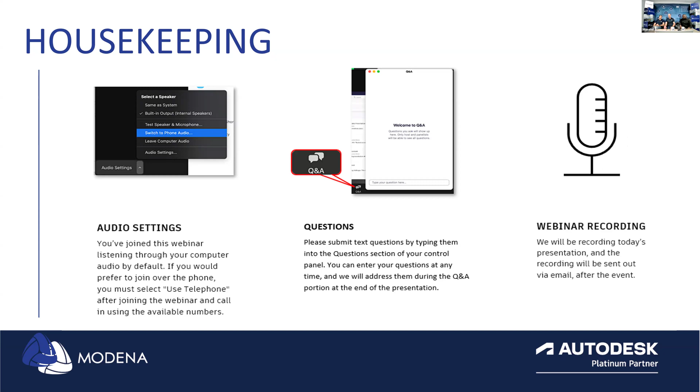Wynand, if you could take it away. So just a quick overview of the contents we're going to discuss today. We're going to look at what infrastructure is, the role Autodesk is playing in infrastructure, the life cycle of an infrastructure project, and then we'll run through some of those cycles in more depth. A little closer to the end, we'll look at future maintenance and monitoring, as well as some smart designs to operation with regards to our projects.

So first things first, what is infrastructure? We normally think, well, what would infrastructure be? A bridge, a road, things. But the term is very broad, it touches everything. It's basically these days the backbone of what connects us as people. If you think of clean water access, if you open a tap, the water comes out. Where does it come from?

Reservoir, pipe, then tap - that is the water infrastructure network transporting water to our houses. So we don't have to live close to rivers anymore. It's not necessary.

Infrastructure allows reliable transport, safe wastewater disposal, and gets clean water back to us. It's not just that, infrastructure covers the whole thing - power lines, power grids, it's infrastructure. Even the sidewalk you walk on is infrastructure. It's a very broad term.

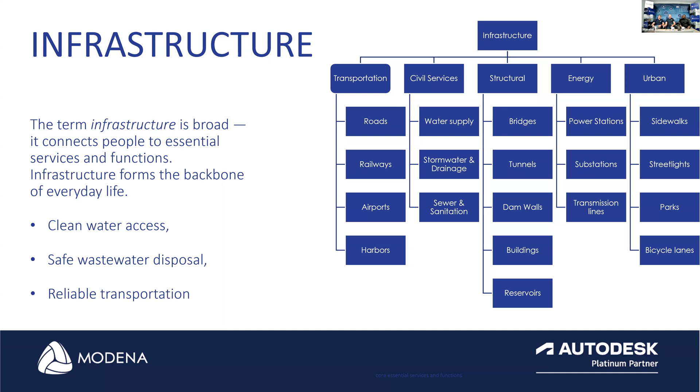So what is Autodesk's role in infrastructure? Autodesk created purpose-built tools tailored for design and analysis of infrastructural systems, and together they compiled an AEC collection - the architectural, engineering, and construction collection of softwares.

In that AEC collection, we have InfraWorks, where we can generate concept designs, do some pre-development analysis, and some detailed visualization in our designs.

Then there's Civil 3D and vehicle tracking, also included in the AEC collection. It allows us to focus more on detailed designs, accurate pipe network design and analysis. We can use vehicle tracking, part of Civil 3D, to do road safety checks, geometry tests - will the truck go around the corner? Is the sight distance good enough? That sort of stuff.

Then we have Revit and Advance Steel for our structural and MEP modeling, as well as for accurate visualization of structural elements. That's touching a bit more on what Mr. Thabang here can do, as well as one of our other colleagues who couldn't make it today.

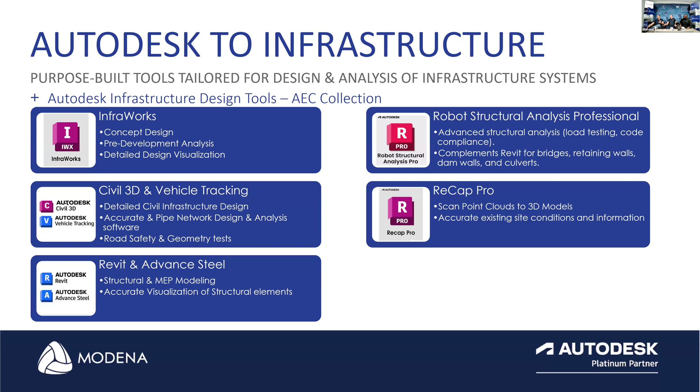So with regards to as-built information, with the whole digital transformation we here at Modena are pushing, ReCap Pro allows us to literally go and scan information and bring it into the design software, using a digital terrestrial 3D laser scanner. It even allows us to do that on infrastructural projects. We'll discuss this a bit later when we look into the future for infrastructure.

Last one, Navisworks and Docs, where we can do model coordination, clash detection, construction sequencing, where we can literally show our clients and stakeholders what the construction sequence is going to be if we build the structural element. Where do we start? We can manipulate it to see, okay, maybe the staircases can be built later, or these columns can be built later, the foundations need to happen first, so that we can plan accordingly in our construction plans, to not get stuck deciding what's next. It also assists us in not delaying the project.

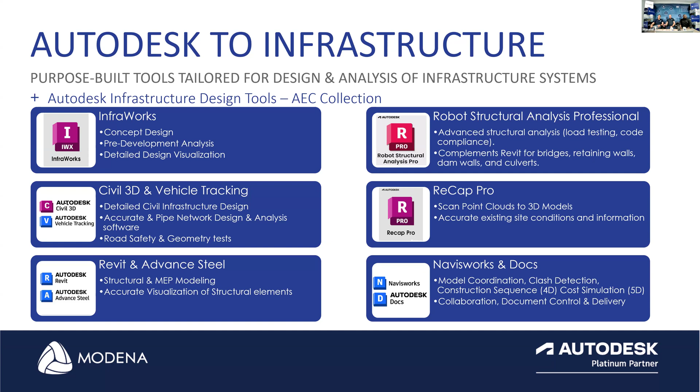Next on our list is the infrastructural life cycle of a project. Each and every project needs a starting point, and where is that starting point? Normally in our heads. We have an idea, and then there's an end point where we hand it over to the client, and they start implementing, operating, etc. For the life cycle of the project, we have to start somewhere: concept design. We have the idea, we have to put it on paper, we need to generate that model to give our clients what they think of. As we drive digital transformation, it might not just be a PDF.

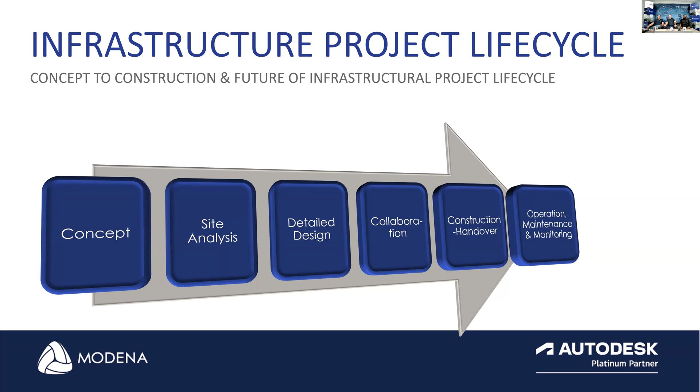Let's look into the first one. What is a concept design? It's the actual starting point, the initial idea, where we shape the ideas, where we get different scenarios that we can explore. It allows for early decision making on the possible and practical issues, to fine tune that design in the beginning already, so that when we present this to a client, we don't present them with something they might laugh at, but rather think, this company, this is what I want.

Concept design allows engineers and planners to evaluate feasibility, investigate construction constraints, terrain challenges, and target the applicable standards early enough in the design phase so we can fine-tune it before we get to detailed design, and avoid the client saying 'no, we have to change this' and going through all those headaches again.

Talking about the client, we've got a question from Anonymous: won't you start with the client's brief before we go into the concept stage? Yes.

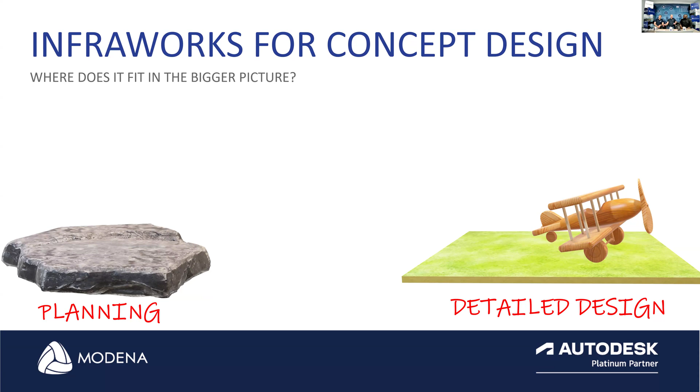So up next we want to present InfraWorks for the concept design. Now, where does it fit in? InfraWorks basically bridges the gap between the initial idea and detailed design very easily, and you'll see shortly why I mean that. It empowers the user to rapidly develop and evaluate infrastructure concepts in a real world context.

Now, InfraWorks has a lot of key capabilities. As we discussed, it allows for that concept design, that pretty picture it can paint for us that we can represent to the client, do some pre-development analysis, get everyone's approval, etc.

I think there's a lot of questions, sorry, just want to go through them. So we've got a question again from Anonymous. The question is, looking at this kind of collaboration, would ACC be the right environment for this? Anonymous just removed that question, I think maybe they're retyping, we'll get back to it when it comes back on. We have got a question from Mr. Erasmus, Quibus, asking the same thing, so it just went from Anonymous to Quibus.

Who would typically then control the main model, and what would you do it in, InfraWorks or Civil 3D or Navisworks? And then we've got a question from Julian saying, how can InfraWorks be used to quickly model a proposed road alignment and pipe network in a real world context so that I can visualize feasibility before detailed design begins?

So we'll get to the second one. Let's answer the first one. The first thing you would need on any kind of project is a common data environment. So ACC is actually the perfect solution for a common data environment. Why? Because it's an Autodesk product and all the Autodesk products tie into it, we're talking file formats, etc.

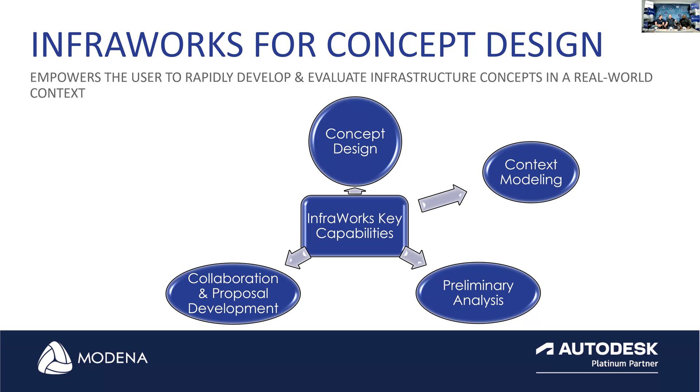Then there's the collaboration and proposal development, the question that we just had previously. We will focus on that section. And then integration with Civil 3D and Revit is made very easy inside InfraWorks. Right. So let's jump into depth with regards to InfraWorks for concept design.

Now, this is what we just discussed. It basically takes something similar to a Google Maps image and it aligns it with a DEM, digital elevation model, that is generated from GIS data currently available from places like the South African Geoportal. NASA, for example, has some elevation models that Autodesk is using to generate those 3D elements.

And that's included with the subscription.

And so what it does is InfraWorks has a model builder where you can go anywhere in the world and grab a section of a surface area and start modeling from it. It automatically picks up existing road infrastructure, some building outlines, but it only assigns its own styles to it, so it's not the actual building that you're seeing.

It assigns the Bing Maps aerial imagery, and then it also represents water areas. So if there's, for example, a dam or a river, it will actually show there's water running there.

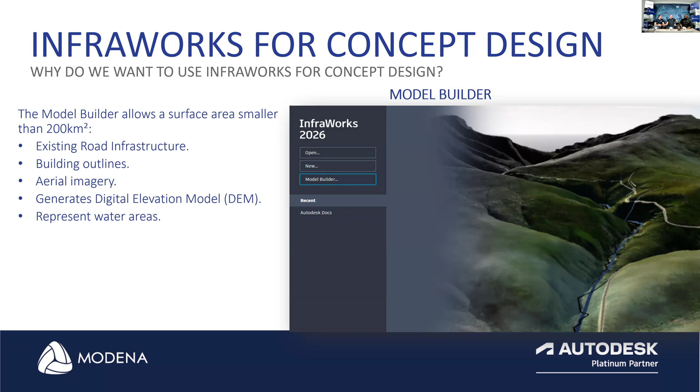We'll get to that. Then the model builder, a generated model, will literally allow you to start adding additional stuff. For example, your additional roads, for the road widenings, for your Revit buildings that you can place in. You can go and add city furniture if you want to build that smart city where you add robots.

So I can take my smart city from here in the cloud, wherever it is, throw it into InfraWorks and overlay it onto existing infrastructure? Yes, you can do that. That's very cool. You can do that.

Okay, and it also allows for initial platform creation that our building is going to stand on. And then there's also where we get to the more in-depth structural elements, like the bridges, the tunnels, that sort of stuff.

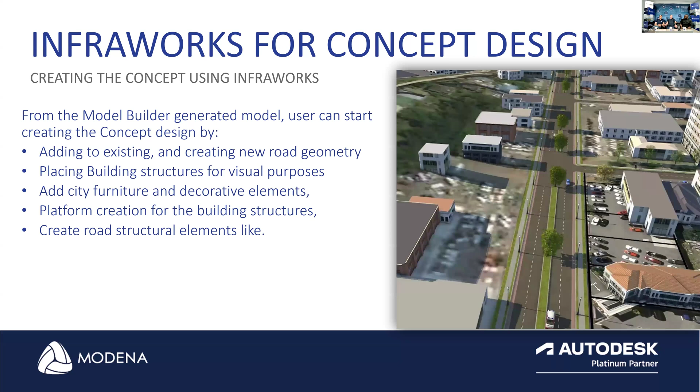Okay, so pre-development site analysis is the second section. It allows us to look into the project for viability, feasibility, possibility, practicality. Is it possible or not? What am I planning? The roads.

We can even do traffic analysis where I can literally go in depth and set up a traffic light sequence and then simulate what the traffic will look like and actually see, okay, do I have to make my road wider or not?

Where was that project where they built a bridge from both sides of the opening? And when the bridge met in the middle, it wasn't aligned. It was off by a lot. Obviously, they never used... I can't remember. They never used it. It's an international project, yeah.

They would not have used tools like this, because tools like this would have shown them the issue in a virtual space before it happened, before the guys actually went to site. Yes, indeed. Okay, all right. And that's why we want to actually drive the digital transformation. Yes, that's actually part of coordination, right? There's something we call clash detection. Okay, that's a big clash.

How do you unbuild a bridge? Happened in Cape Town as well. Something locally, in Cape Town City there's a bridge that just ends, stops up in the middle - nowhere. They built it and it just stops. Yeah, it just stops, and clashes cost millions.

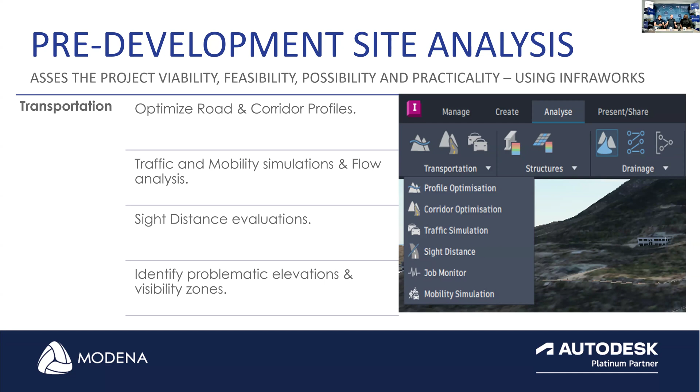Fantastic. So there's the whole traffic and mobility, the sight distance evaluation - very important for road constructions - and then to identify problematic elevations, that's that best possible route, like I've mentioned.

And then structural - it allows for that preliminary line girder and refined bridge analysis. Now, this is not a robot structural analysis type of software, so I would still recommend using that - it is part of the AEC collection. So why not use tools that are more accurate with regards to design standards, etc.

We have some questions. We've got two questions - one's from Jason. Jason's asking, can external as-built data be loaded into InfraWorks to allow checks during feasibility? And the second question is gone.

Alrighty, so can we answer Jason's question, or is that coming up in the presentation? Can external as-built data be loaded into InfraWorks to check - so, can external as-built data be loaded into InfraWorks to allow for checks during the feasibility study? Yes, it can.

Since it automatically, like I said in the beginning with Model Builder, you go literally anywhere - if the road was built there, it automatically identifies that the road is built there. It's not using the same assembly that road was normally built on, if we were to think of Civil 3D perspectives, but it literally shows that there's a road there. Now if you want to widen this road, maybe change the sidewalks, you have free access to go and do that inside InfraWorks directly. So Jason, yes, it can, in short.

Back to structures, InfraWorks allows you for the placement of the geolocation points of your structures, meaning bridges - I'm not talking about buildings now, I'm talking about road structures. It also allows you to prep the model for in-depth structural analysis and modeling.

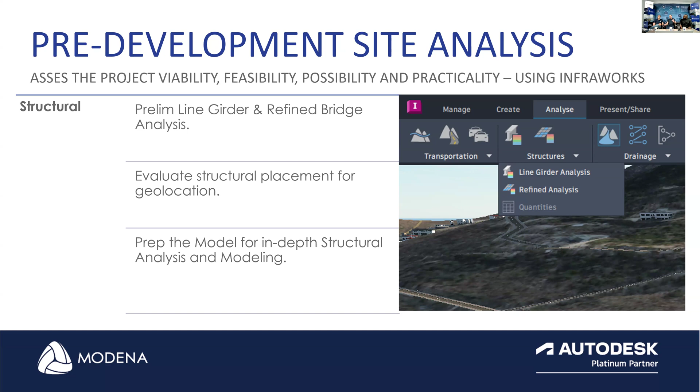And then the drainage that allows us to automatically generate watersheds in just a few clicks. It already picks up the design roads inside InfraWorks, and then it will literally show you the points where the water is going to dam up, where all the water is going to come to a specific point, and then we know exactly where we need to add the culverts.

And then there's the preliminary pipe network analysis and auto editing tools. InfraWorks is a bit limited with regards to pipe network creation, but you can also simulate some rainfall scenarios and identify flooding and overland flow paths.

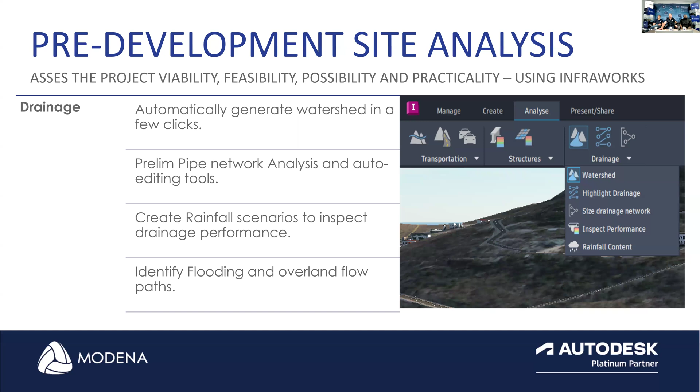There's nothing existing. I can use InfraWorks to build a bridge, simulate traffic across the bridge, take that very bridge into Revit, fine-tune it in Revit, push it into Robot to make sure it won't fall. Go through the process, appoint a contractor, and in 12 months I've got a working bridge.

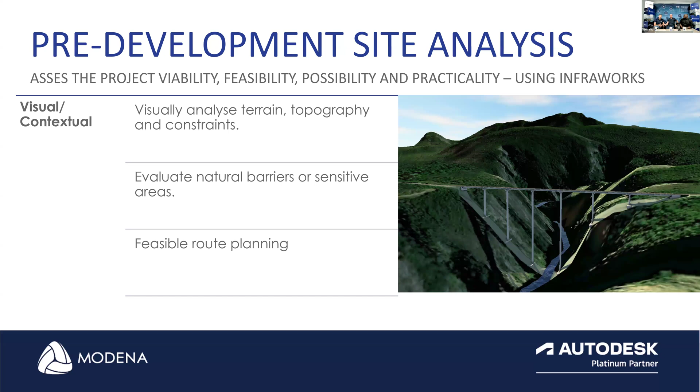That's insane. Yeah, basically exactly like you've mentioned. So that's called a workflow. For me, it's like - how did guys do anything in the past? Instead of 12 months, it used to take them 12 years.

And then there's some additional connectors that you can add, like the ArcGIS connector that can show us where the wetlands are, the flood zones, some zoning regulations, etc. It's a very fancy tool to use.

Then there's the additional external data sources, like I said, South Africa's geo portal, that you can very easily go and grab some surface information in order for you to start your more finer, in-depth, detailed designs.

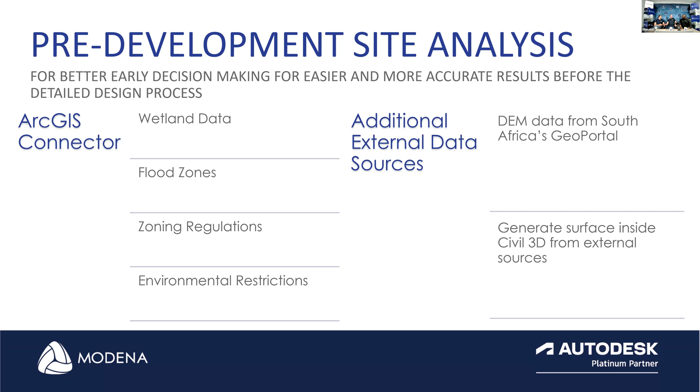Right, some detailed design and analysis section. This is where we move away a little bit from InfraWorks, where we can literally take the InfraWorks information into software like Civil 3D and Revit.

I'm going to talk a bit more about Civil 3D first. InfraWorks planning roads basically only takes over the center alignments. But the component roads is seen in Civil 3D as actual corridors. It automatically assigns the assembly for it, as well as generates the vertical alignment for that road. So it already knows exactly from InfraWorks what the elevations for cut and fill conditions to target.

So all you have to do is just look into that, change some curves here and there, change the assembly a bit, reassign it, and it's going to be much easier than actually starting in Civil 3D from scratch. A lot quicker as well.

Right, and at the end of the day, you can add some additional analysis tools that we will also be focusing on in a few seconds.

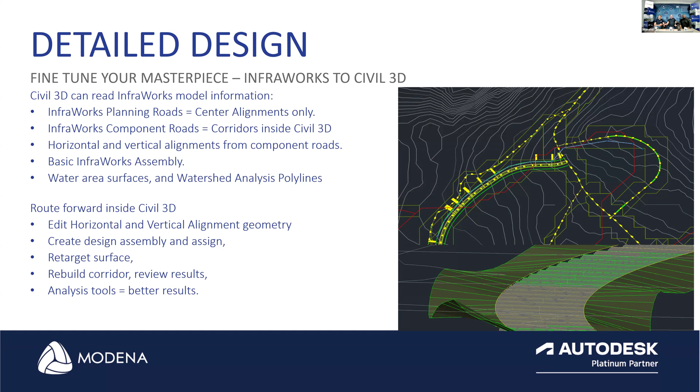We normally recommend to our clients the Devotech IDAS, the integrated design and analysis suite package, for those people who are designing the civil infrastructure. A bit more in depth, though.

That's for road engineers, water engineers - those guys specifically, for the fact that they have taken Civil 3D and implemented workflows that make it quicker for you in order to perform all the designs.

You also need to create the assembly, but other than that, it generates everything else for you. And that's not included - that would be an additional add-on.

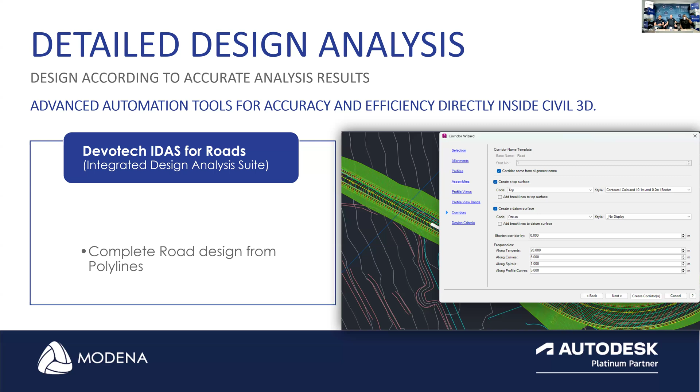All right, then there's also pipe networks, where we have the pipe network wizards for water, stormwater, and sewer networks. Same as roads - directly from a polyline, specify the depth, and it will add in the pipes and structures that you specified.

Brilliant - you don't have to go and manually place them, insert, split the pipes. It takes your design process from a few hours to a few seconds.

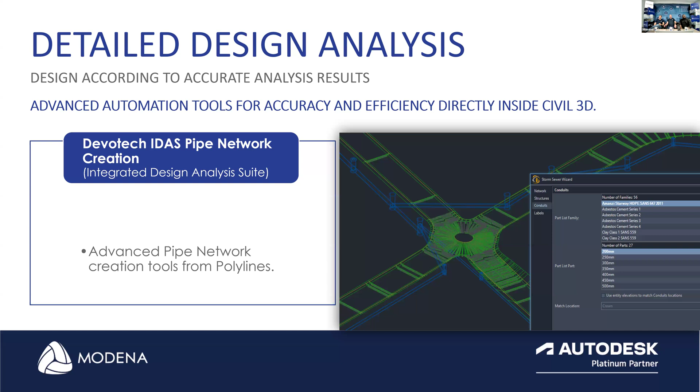Devotech IDAS also has a pipe manager that allows you to analyze your pipe networks, which is very fancy. I'd recommend it if you haven't seen it, talk to us, we can come give you a demo. It's a good software, has a strong engine, uses the rational method, and it's built on the EPA SWMM engine, so it's very accurate as well.

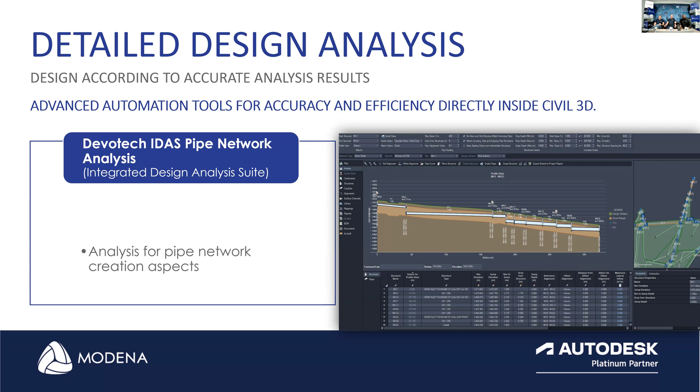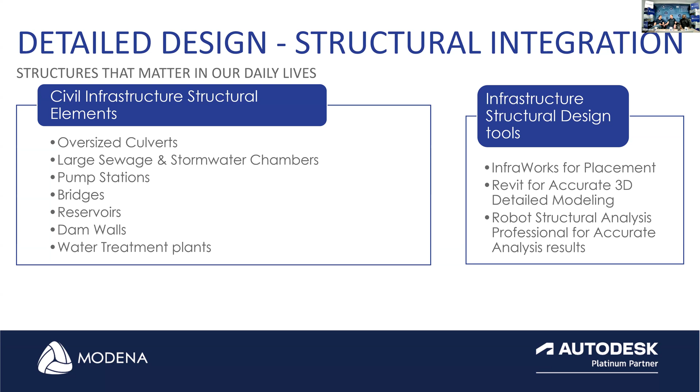Then some detailed design for our structural integration. We can use Revit for that, even directly from InfraWorks, where we can start fine-tuning our structural elements.

Just to keep that in mind, what's the workflow going to be from InfraWorks? You can generate a model through the model builder, do your whole concept design, move over, check some site analysis, and make sure you build your bridge according to the elevation sections and lengths.

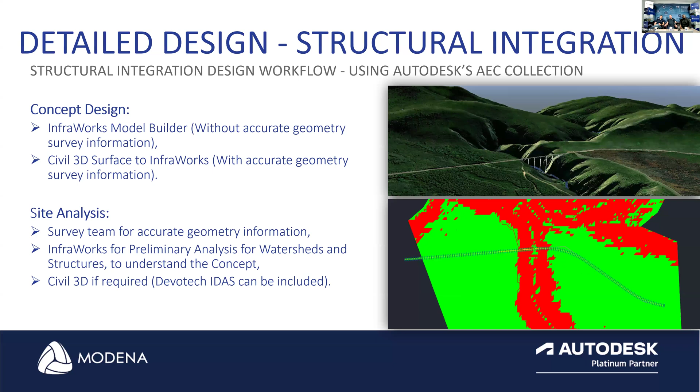We've got a question from Julian. He says, I'm struggling to take my Revit structural model into InfraWorks. It loads, but it doesn't appear. What am I doing wrong? So InfraWorks is working specifically with geolocation data. Without it, if a Revit model is stuck on the actual center point of Revit, meaning 0,0, then it's basically going to put it down at 0,0,0. If we're down here in South Africa, it's not going to work. Is it easy to fix?

So I've spent six months designing this building in Revit, and how do I geolocate it properly so I can push it into InfraWorks? Revit has a relocate project feature. You need to understand project base points, survey points, and internal origin points. Then based on wherever the model needs to go, you can relocate the project by specifying the coordinates. So it's not lost, it's just another workflow, it needs a bit more love.

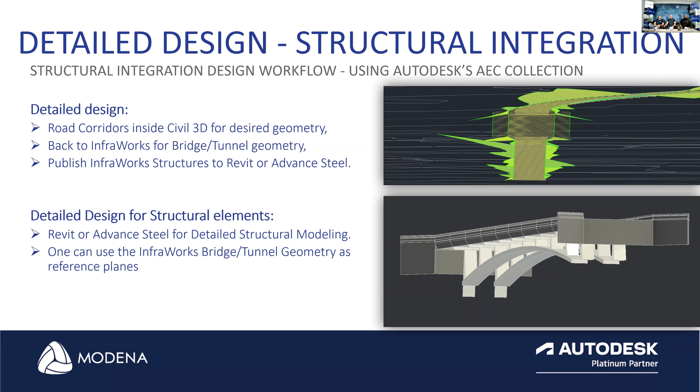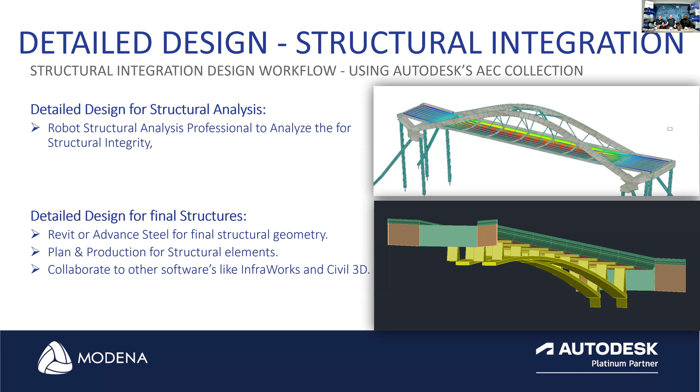We did a session back in February where we showcased the collaboration between the different softwares in the structural environment, from Revit, Advance Steel, and Robot Structural Analysis, to more easily get that flow running in the whole session, to get your design analyzed and bring it back according to the accurate information. But just for the sake of time, Robot in a nutshell does what?

Analyze the structure. It's where we would sit with the standards, a pen and paper, and do the manual calculations to get to the point where we specify the member depth, what type of member to use, like H-beams or I-beams, or what the concrete requirements are - concrete strength, reinforcement, and so on. Robot does that for us, it helps us do that. It gives us recommendations, and then we can fine-tune it accordingly.

We've got another question here from Anonymous. Suppose you're moving from InfraWorks to Civil 3D to refine it. Let's say you have multiple roads that you graded in InfraWorks - are those grading profiles taken to Civil 3D when you import from InfraWorks, or do you have to recreate them? A component road is seen inside Civil 3D as an actual corridor, so it already assigns a basic assembly to it with cut and fill conditions, pavements, all of that stuff. If you model it with a different assembly inside Civil 3D and then take it back into InfraWorks, InfraWorks has the ability to read the assembly that you assigned inside Civil 3D.

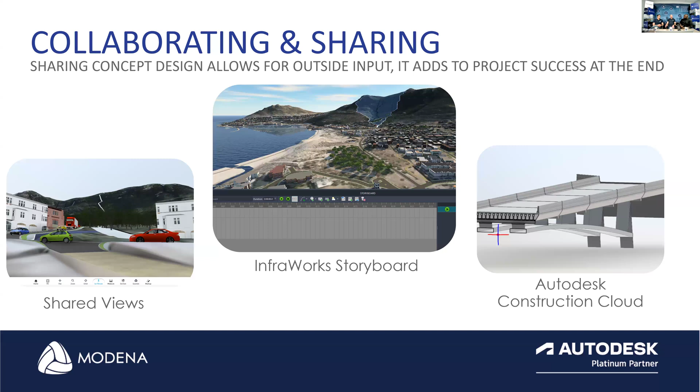So people - as you would know, if things live on your hub, you are the owner of that content. And so if you want to share that information, I can bridge my information into your hub whilst it's still on my hub.

But I also think it's quite pertinent to understand any JV has a boss - you'll have a major stakeholder and a minor stakeholder. So I think a discussion needs to be had regarding the JV - who owns the data, who owns the project, who owns what. But essentially everything will live in ACC, and the workflow will be set up.

The workflow is what determines the conditions of the JV. So Anonymous, ACC will be your collaboration tool. How you collaborate will then be discussed per project, but that typically gets recorded and delivered in your BIM execution plan. Hope that helps, Anonymous.

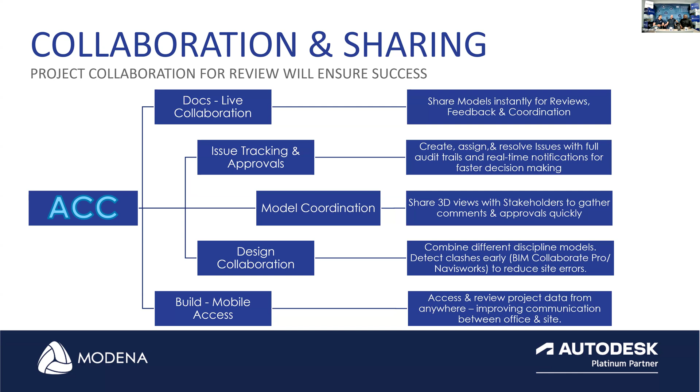Yeah, and there's additional information on the screen that you can use to understand where ACC plays that crucial role in this whole common data environment - how we collaborate easier, quicker, all of that stuff. Perfect, right.

Then construction, as built and handover. This is where we actually build the project that we are working on.

ACC allows for that common data environment. Now, Thabang here to my left is a professor in this stuff. We actually call him Prof. We can almost call him Dr. ACC.

So it actually ties into the question previously about the JV. Your common data environment is set up for multidisciplinary practice as well, so you have your architects, engineers, BIM leads, project managers, client stakeholders, and so forth. As I've mentioned, the folder structure in ACC is what gives birth to this workflow in terms of sharing information. If you have external parties that need to be part of your common data environment, you create a subfolder, work in progress, with all the external disciplines, and they tie into that folder.

And then we're able to track progress. Yes, 100%. We also have something called BIM Collaborate Pro. That is your design collaboration and your model coordination. Design collaboration is specifically for your team handling the different disciplines and professionals. Model coordination is specifically for handling all the different models, clash detection, etc.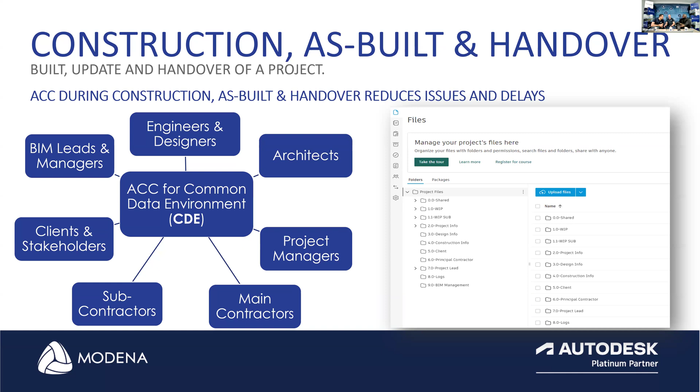Yes and no, it's better. BIM 360 works on the old coding, and ACC works on the new coding. Are the functions the same? Yes, but it's better on ACC because BIM 360 has been phased out.

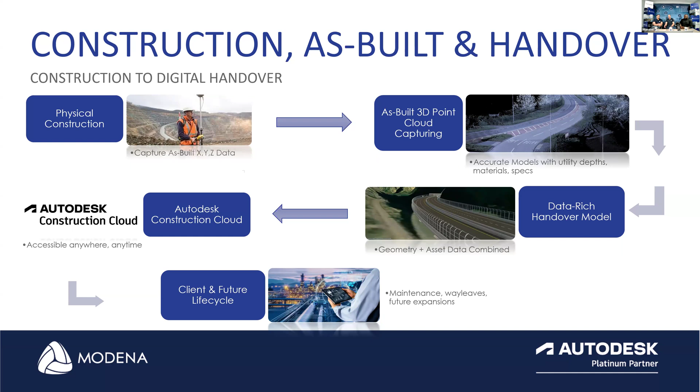I think you can touch a little bit on that. Yeah, so BIM 360 is still around, only for the sole purpose of legacy projects. We understand that some projects aren't over in a year or two; some take 10, 15, 20 years, especially these large infrastructural projects, so for that reason it is still there. But BIM 360 and ACC are one and the same.

What's happened is Autodesk has started investing huge amounts of money into research and development, growing this ACC brand, which then split off into Docs, Build, Takeoff, Collaborate Pro, all offering different functions and features, each catered to a different section of the project lifecycle. So yes, they are the same, but ACC is the preferred platform for common data environment. And it makes sense because it's easy to use, it's user friendly.

And it allows for all the parties to have the same information at the exact same time. They can sort out the issues much quicker and limit those hold-ups during the whole process, and in this fast-paced world that we are in, it sorts out all of those issues.

One of our colleagues, Nicole, actually mentioned it this morning: ACC is similar to Uber Eats, and I'm stealing this from her, but I think it's fantastic. With Uber Eats, you order a burger from Spur, you pay for it, you see it's getting prepared, who's preparing it, what time the driver is collecting it, you see when he collects it, and you can track him on the map to the point where he delivers it at your front door. ACC is the same.

It allows us to track progress from X to Y, and allows us to see what happens during that time. And my question is, and Nicole's question is, why are we tracking burgers better than we are tracking projects?